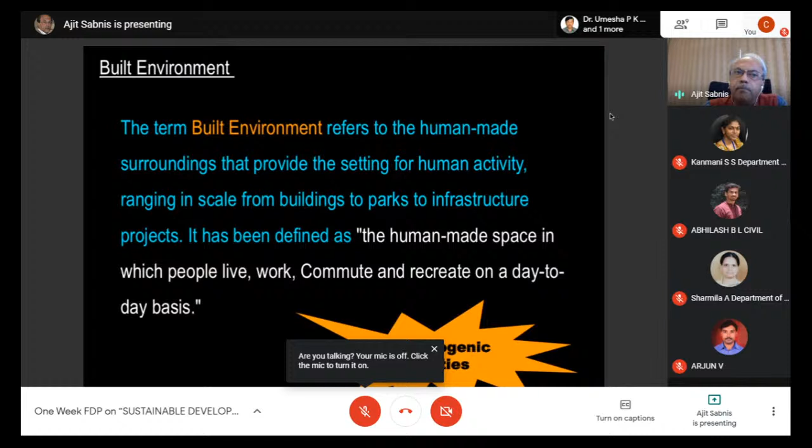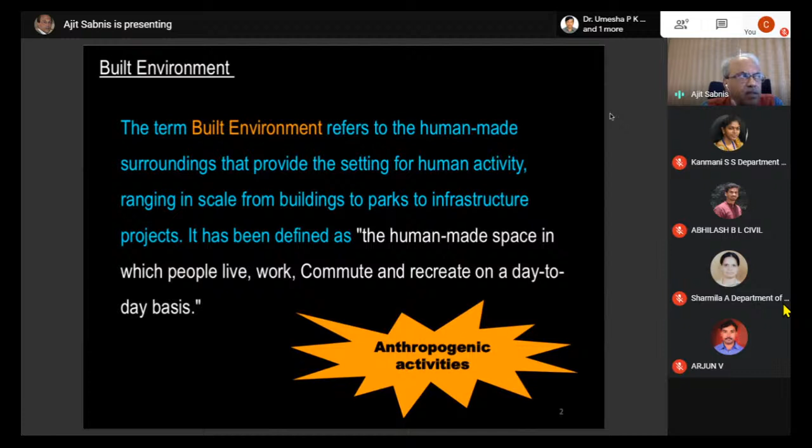It's basically half of the problem done once we understand the terminologies involved in it. The environment itself can be differentiated between natural environment and built environment. Now, we are more concerned with the built environment. Natural environment is all that we see, the rivers, the air around us, everything that is around us which is natural. That is natural environment.

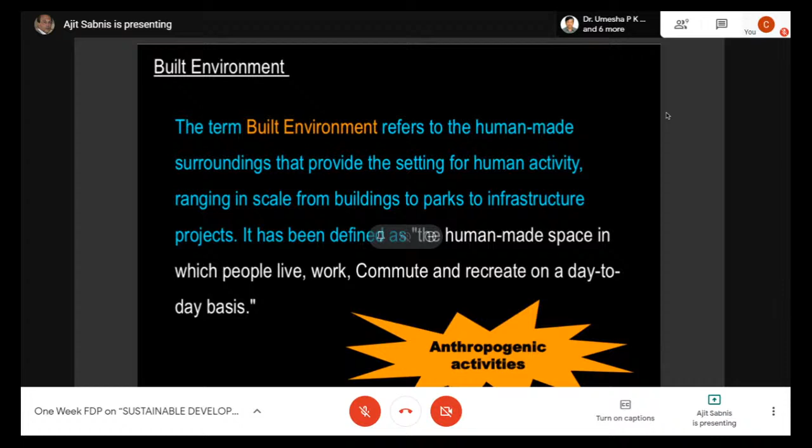Now, how do we define built environment? The term built environment refers to the human-made surroundings that provide the setting for human activity, ranging in scale from buildings to parks to infrastructure projects. It has been defined as the human-made space in which people live, work, commute, and recreate on a day-to-day basis. In a nutshell, all that we human beings build for our own comfort and living is called the built environment. It is the roads, the houses, the power stations, everything we build, whatever we demolish, everything we do for human comforts and human greed, that all comes under the built environment.

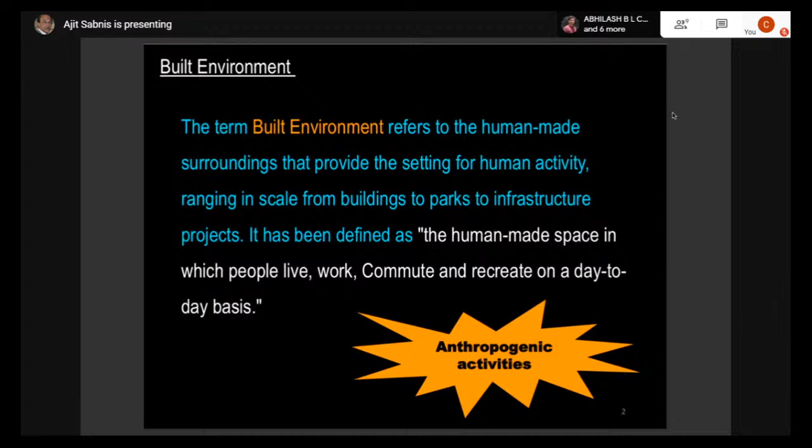Now, after built environment, what exactly is sustainability? How do we define sustainability? We have many definitions for sustainability. The National Building Code 2016 Part 11, Approach to Sustainability, a new introduction into the National Building Code, defines sustainability as the state in which components of the ecosystem and their functions are maintained for the present and future generations.

The present and future generations is to be underlined here. Sustainability never means that our present needs, present requirements, present growth, and present industrialization should be completely negated and everything should be reserved for future generations. That is not the definition of sustainability. As we go further, we will understand the true meaning of sustainability, but we have to look after the present generation's needs also, and the future generation's needs. So that is the definition of sustainability as per NBC.

Now, the World Commission defines sustainability in terms of sustainable development. Sustainable development is that which meets the needs of the current generations without compromising the ability of future generations to meet their own needs. Both definitions are the same in spirit and intent.

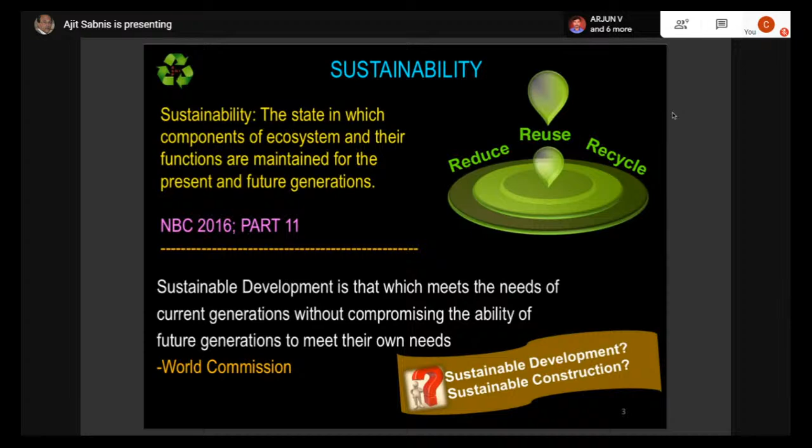Now buildings not only are constructed with inert materials, that is what the general opinion is, but no, buildings are, to me, actually living beings. Why are they living beings?

The buildings respond to the environment which is next to it. If the environment is adverse, if the environment is bad, then the buildings react accordingly. If there is a foul smell outside in the environment, in the building there becomes the foul smell. So whatever the environment is, the buildings reflect and then react to that and respond to that environment. For example, if we have a corrosive atmosphere outside, the buildings start responding to it in terms of corrosion. So these are the important things.

That is why buildings interact with the environment in various ways throughout its entire life cycle, from pre-construction to demolition stage. Now all four cycles are absolutely important. The life cycle of a building - the pre-construction phase, the construction phase, the operating and maintenance phase, and lastly the demolition phase.

So this is the life cycle of a building, and this also is the life cycle of a product. If you take a particular product, what is it in the initial stages and what is it in the present stage, and how during its maintenance and operation stage - the entire thing becomes a life cycle from its inception to the demolition part of it.

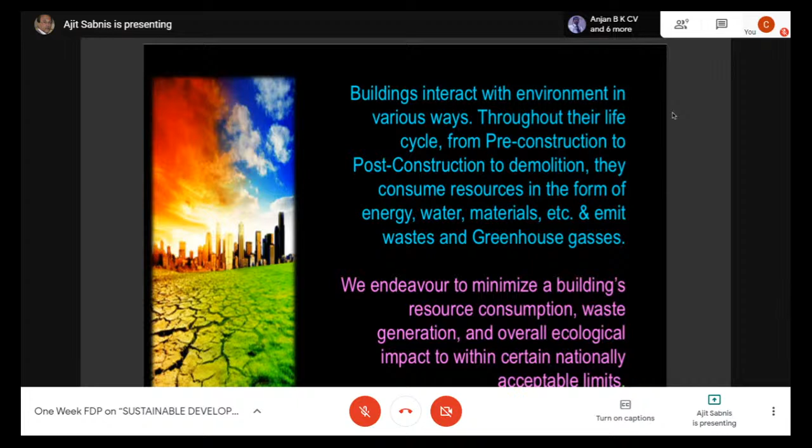Now we endeavor to minimize a building's resource consumption, waste generation, and overall ecological impact to within certain nationally acceptable limits. So this becomes extremely important. So in sustainability or sustainable development, we have to use - it is not that sustainability or advanced technologies or technological advancements should not be considered. This is a myth. Please understand that sustainable development is not going back to the olden days, etc. But in the present system, under the present circumstances, we need to evolve. We need to base our further development based on the wisdom what we have acquired from the past. So that is more important.

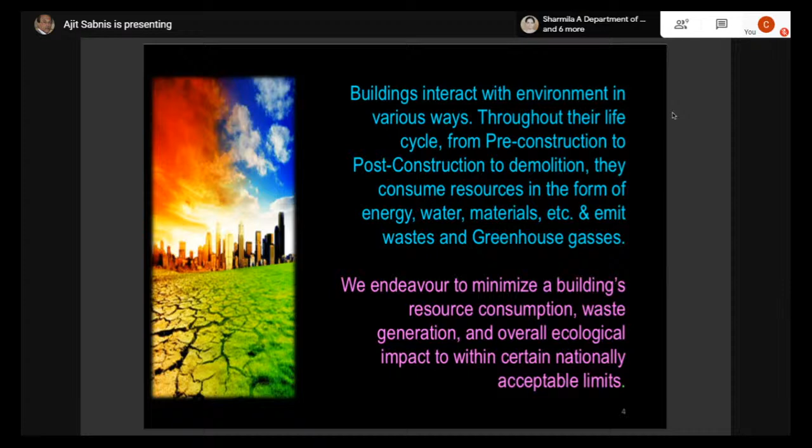So to be very frank, it is impossible for anyone to assess the sustainability to its maximum limit or in its entirety. We can only take the most impactful parameters and then look at them.

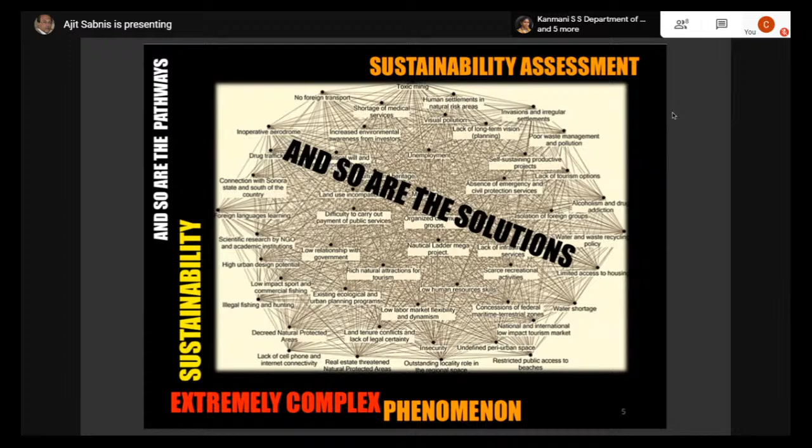Now the construction sector is absolutely important. The construction sector's contribution to the adverse environment is also very, very critical. Let us just see what exactly is that. Let us look at the contribution of the construction sector.

Globally, buildings are responsible for about 40% of the energy that is produced in the globe - the entire energy produced in the globe, construction sector consumes about 40% of it. An estimated 42% of the global water consumption and 50% of the global raw materials are consumed by the construction industry. And thirdly, an estimated 50% of the world's air pollution, 42% of its greenhouse gases, 50% of all water pollution.

48% of solid waste, and 50% of chlorofluorocarbons are all due to the built environment - directly or indirectly because of the construction industry. So dear friends, what this reflects is the construction industry, directly or indirectly, is responsible for approximately 40 to 50% of the impact that is happening in terms of sustainability or in terms of adverse effect on environment.

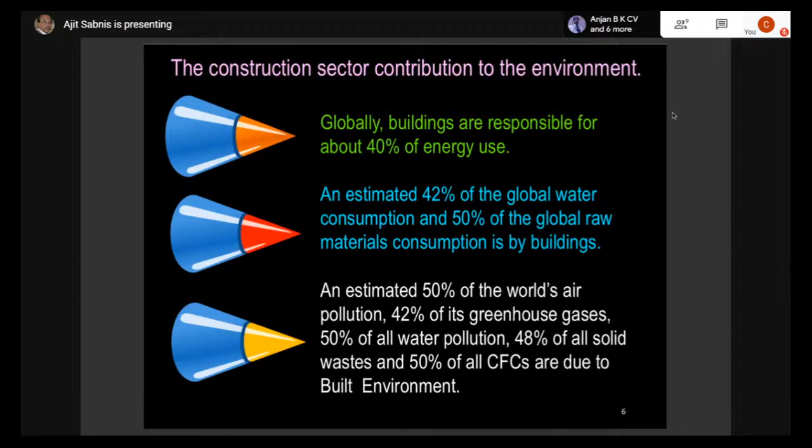Now let us look at the carbon footprint as far as India is concerned. India stands, sometimes third, sometimes fourth, but now it is almost in third position in terms of greenhouse gas emissions at the international level. First is USA, second is China, and third actually was all the European Union together, and together they emit about 55 to 60% of total greenhouse gases into the atmosphere. India, though in 4th position, emits about 6.5 to 7% of carbon dioxide into the atmosphere.

This emission of carbon dioxide or greenhouse gases is considerably reduced in the last 3 to 4 months because of the corona effect and the lack of activities happening. But please mind it, just because air pollution has reduced, the effect of global warming has not been reduced. It still continues to look into our eyes. I will tell you in future slides why that is so.

India emits about 6.5 to 7% of total greenhouse gas emissions, and in that, approximately 40 to 50% is contributed by the construction industry. This 40% of emission can be divided into energy produced and consumed, or greenhouse gases emitted, in a ratio of 75 to 80% to 20 to 25%.

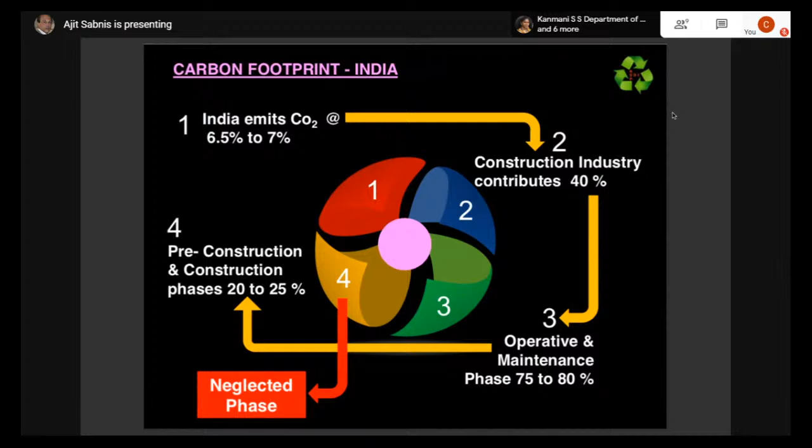Now we have seen a huge amount of unprecedented events in recent times. What are we seeing? Global warming, the warming of the earth, and consequent climate change is happening, whether we understand it or not. Increased carbon dioxide concentration in the atmosphere has been going on. The rapidity with which greenhouse gas emission is increasing, the rapidity with which ocean acidification is happening - the ocean acidification is happening at a rate which has never happened in the last 300 million years. The ocean waters are warming up even at 700 meters deep.

Rapidly changing rainfall patterns, accumulating waste, urbanization and rural migration - we were all hearing about these, but nowadays I think all of us have had an opportunity to understand what exactly is rural migration, what is reverse migration, what is urbanization. In the last 4 or 5 months, because of the corona and COVID effect, those people who came looking for jobs and a better lifestyle from rural areas came to urban areas - that is the migration, that is called urbanization.

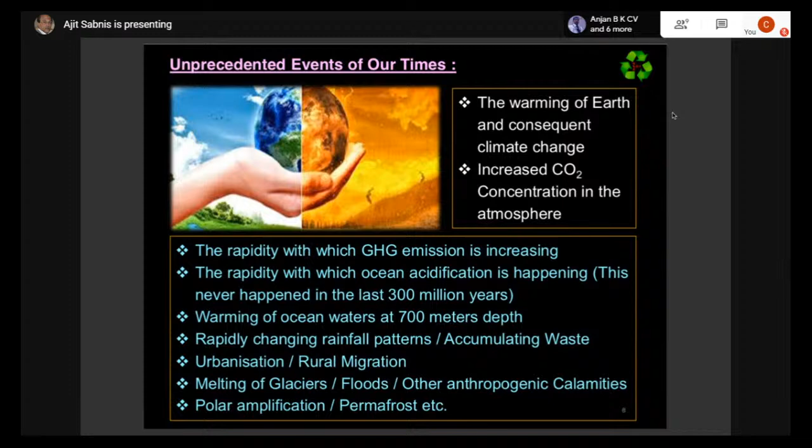Right? Now, let us look at what exactly is the urbanization cycle. We talked about urbanization. I gave you the example of how rural people come into the picture, causing urbanization. They come in search of good jobs, better living style, better education for their children, etc. Then because of this urbanization, industrialization starts taking place, because labor becomes available, so industries and startups start growing up. Government policies also play a major critical role in this.

Then, to address the existing increasing population, especially in the urban areas, infrastructure development takes place. That is roads, transportation, energy, power stations feeding power to the cities, and connectivity to the various surrounding areas. All these things come under infrastructure development.

The more urbanization, the higher will be the industrialization, and the higher the industrialization, the higher will be the environmental impact. Once there's environmental impact, higher will be the greenhouse gas emissions, and the higher the greenhouse gas emissions, the thicker will be the blanket. So there will be lesser heat that escapes into the atmosphere, causing global warming and causing man-made disasters. Once man-made disasters come into the picture, the migration that we saw from rural to urban areas, that reverses, and it's going to happen back to rural.

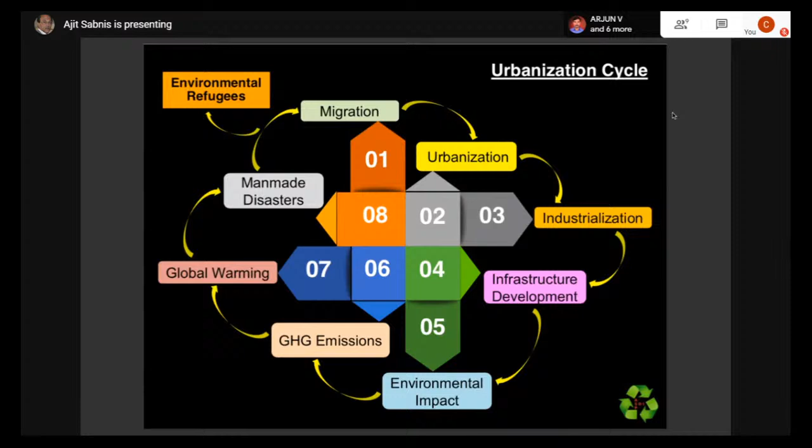Now, what is the next impact? What is the next terminology we try to understand? We understand what exactly greenhouse gases are. Greenhouse gases are compounds in the atmosphere capable of absorbing infrared radiation, thereby trapping and holding the heat in the atmosphere. That's what we explained and discussed just now.

Now, global warming is the increase of Earth's average surface temperature due to the effect of greenhouse gases. These greenhouse gases form a blanket that does not allow the heat to escape, so the heat gets accumulated, causing the warming up of the globe, the warming up of the Earth's surface, etc.

So the average Earth's surface temperature—where is it measured? It is not measured at every point, but at particular points on the surface, including the ocean. That's because 75% of the Earth is covered with water, so just 25% is land. We need to take the average of that, and the average Earth's temperature is increasing considerably.

Now, when we talk about the greenhouse gas effect, there are quite a few greenhouse gases. It's not only carbon—for example, carbon footprint is not the emission of carbon only, but majority of it is the emission of carbon dioxide, the gaseous materials or entities that come into the picture. Along with carbon dioxide, there is methane, oxides of nitrogen, fluorocarbons, and sulfur hexafluoride, etc.

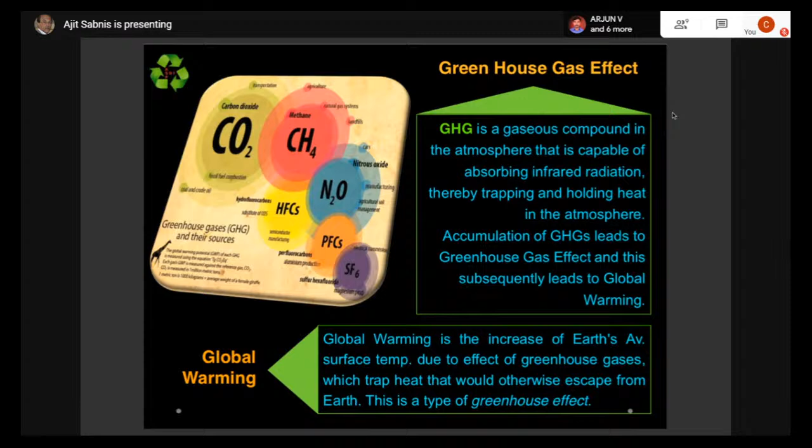This is measured using what is called the Keeling curve, using the Keeling instrument. This measurement was developed by a scientist called Charles Keeling, who mounted a set of monitors measuring carbon dioxide concentration in the atmosphere on a mountain top of Hawaii in 1958, and we are still using it.

In 1958, the carbon dioxide concentration was about 320 ppm, parts per million. Now, as of 2020, the carbon dioxide concentration in the atmosphere is 417.16 ppm. This is available every day from the carbon dioxide data, and I had taken this reading about 4 days back. If we reach about 450 ppm, it is extremely difficult for the human species to survive.

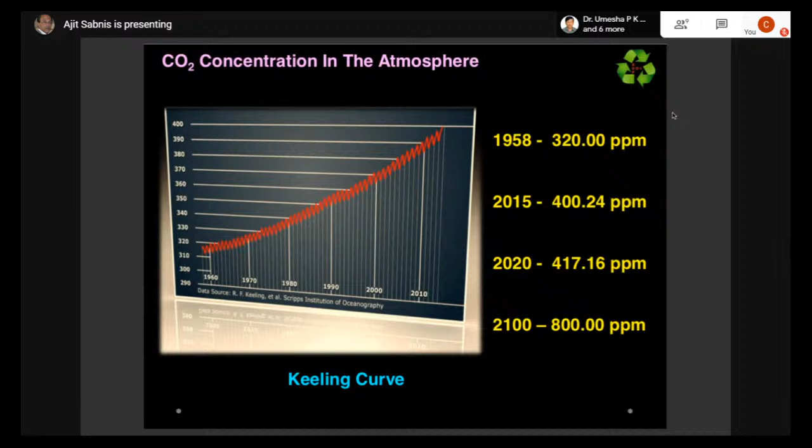Next, what is important is what is called global warming potential. As I said earlier, there are quite a few greenhouse gases other than carbon dioxide, such as methane, nitrogen protoxide, fluorocarbons, and sulfur, etc. All these things are converted equivalent to carbon dioxide. That's why when we say carbon dioxide or greenhouse gases expressed in terms of carbon dioxide, all other greenhouse gases are also involved, converted equivalent to carbon dioxide. This is called global warming potential.

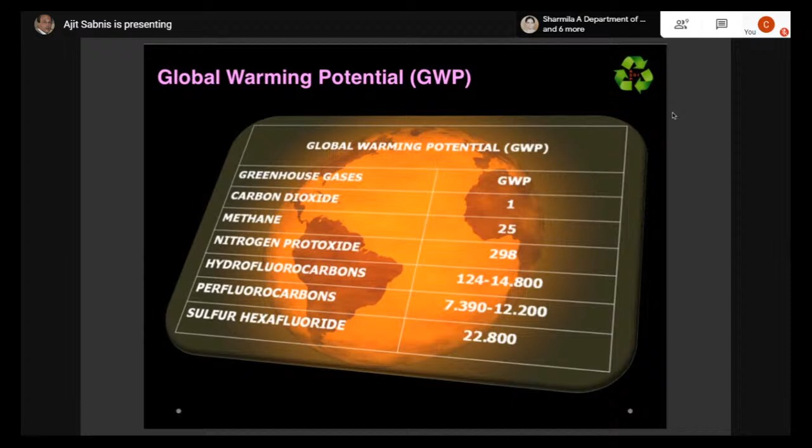Now the next important thing we need to know is global warming itself. What exactly is global warming? I would like to briefly recall your attention to 2015, when there was a summit called COP21 in Paris. COP21 is considered one of the very important summits from the sustainability and environmental point of view, wherein about 195 countries came together and signed an agreement.

By a 4 degree centigrade rise in average global temperature, a 50% decline in crop yield is projected. Melting of glaciers, loss of moisture from soil, changes in rain patterns, heat waves, floods, droughts, cyclones, etc. will continuously increase. There are quite a few coastal cities of the world, including New York, Tokyo, Shanghai, and Hong Kong, that all have a very real fear for their existence if temperatures rise by 4 degrees.

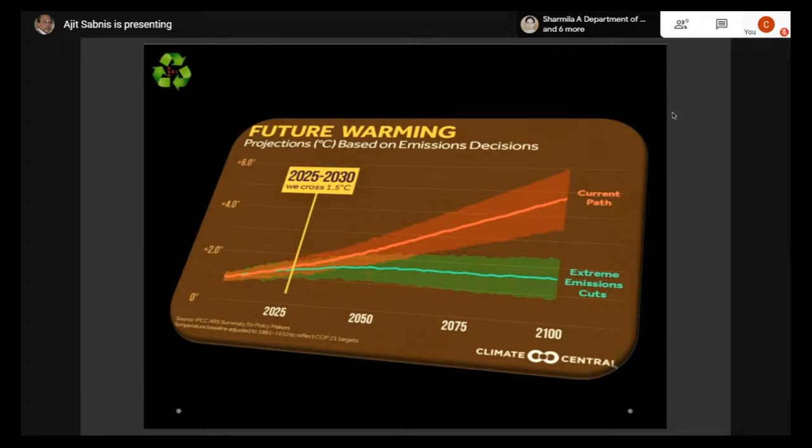Now what we are talking about is an increase of 5 degrees. That's why containing and controlling global warming becomes an absolutely important phenomenon. I also talked about polar amplification, which involves the melting of the ice and the exposing of what lies beneath, etc.

Now there is another important phenomenon. There is a lot of wood which gets hidden when ice formation takes place. When the ice melts, all this wood gets exposed to the heat, and it is all rotten wood. Because of the heat, it catches fire, which further increases the melting of glaciers. Not only that, it also enhances greenhouse gas emissions, particularly carbon dioxide emission in the atmosphere, which further adds to the problem. So this is actually a very complicated cycle, and this phenomenon is called polar amplification, which results in so many things.

So in a nutshell, what we can understand is the built environment, from an engineer's perspective, is responsible for greenhouse gas emissions, which is directly proportional to the warming of the earth. Then there's indiscriminate use of natural resource materials in construction, resulting in resource depletion, because we need more construction, more infrastructure development, and this will considerably reduce resources and cause depletion.

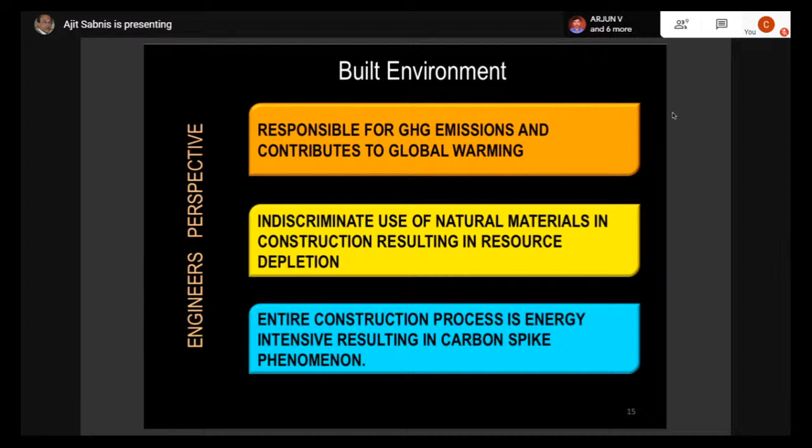And another important thing is, it is not the human species alone that lives on planet Earth. The entire ecosystem, the entire biosphere, comprises several species. They say it is around 84 lakh species, including the human species, that exist on the earth.

By development of infrastructure, by building roads, etc., we cause what is called habitat fragmentation, which you would have seen considerably - elephants crossing roads, cheetahs on the road, etc. When we start occupying their space, where roads pass through forest areas, the animal species get confused. They suddenly find something new in their regular pathway, and they get confused.

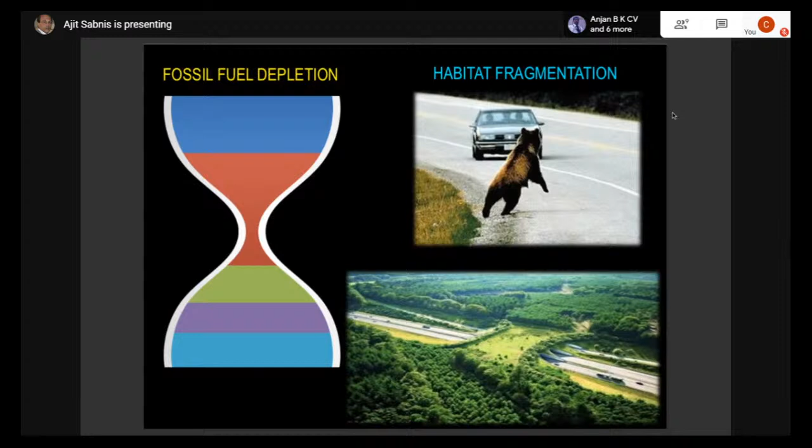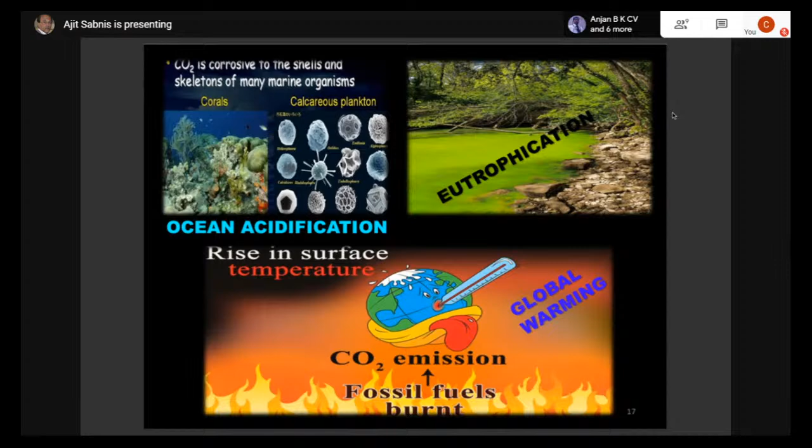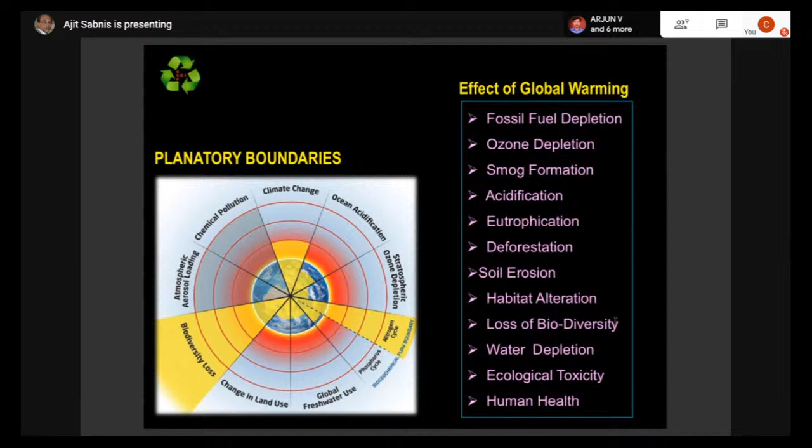But dear friends, we have no other option, isn't it? So that is why the first term in the title of the seminar is 'adopt' - we have no other option, we need to adopt these changes, but simultaneously we can't remain complacent about what is exactly happening. On the right side, you see various effects of global warming, which we already discussed.

Now we come to the next important terminology, called embodied energy. Embodied energy is the total non-renewable energy that goes into the manufacture of a material, and it plays a large role in the choice of building materials. For example, let's take the ceramic tile - if you want to calculate the embodied energy of a ceramic tile, what do you need? You need to take into account the entire life cycle of the ceramic tile.

Now, what is the starting point of the entire life cycle of a ceramic tile? The starting point is the extraction of the raw materials required for making the tile. For extracting the material, you need equipment at the site, so the energy or fuel consumed by the equipment is counted.

The second stage is transporting the raw materials from the source to the factory, which consumes energy. At the factory, there is a huge process of converting and heating the ceramic, adding admixtures and other compounds, then burning it to about 1400 degrees centigrade.

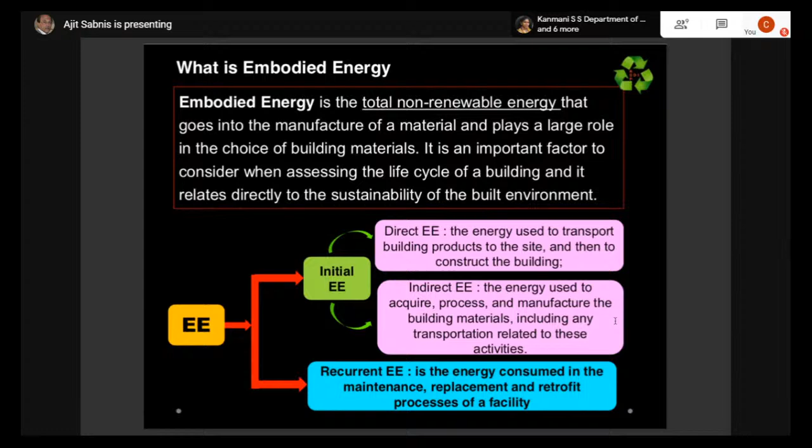Next, let us look at what is important: the embodied carbon. Similar to embodied energy, embodied carbon also exists. What exactly is embodied carbon? During the entire process of manufacturing a product, taking the ceramic tile as an example, all that which is embedded in the manufacturing of the tile is the embodied carbon.

Embodied carbon is the carbon footprint of a material. When I say carbon footprint, remember it is the emission of all carbon greenhouse gases, including 5 or 6 other primary gases, which are converted equivalent to carbon dioxide, and that is called the carbon footprint of the material.

It considers how many greenhouse gases are released, and embodied energy is expressed in terms of joules per square meter, or per unit, or per kg, or per volume, etc. Embodied carbon is expressed in terms of kg carbon dioxide equivalent.

This is very important, the small 'e' which means equivalent. When we write equivalent, all other 5 or 6 greenhouse gases are converted equivalent to carbon dioxide per kg. Embodied carbon can be measured from cradle to gate.

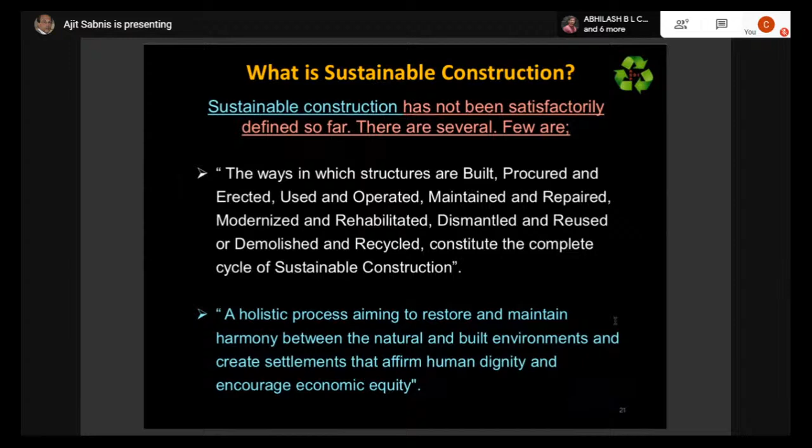There are several definitions which I would not like to go through, but are available to you on your screen; you can refer to them later. What is important is the one which I have underlined, the most apt definition I felt: sustainable construction is the creation and responsible management of a healthy built environment

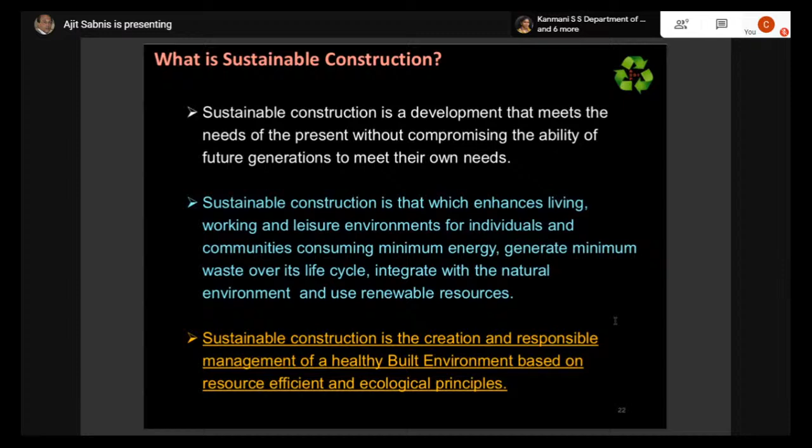based on resource efficient and ecological principles. All these principles we talked about—reduce, reuse, recycle—and understanding the various terminologies which help in reducing the consumption of natural resources, should be involved in the sustainable construction process, so that we do not cause much deterioration to the ecological surroundings and the environment continuously.

Now let us look at what exactly sustainable construction involves.

Sustainable construction involves a very wide scope of activities, and primarily it starts with the designing part of it. How do we use the space? How do we optimize the space? Let's say we have an extension area, Jayanagar, and in Jayanagar I have a 60 by 40 site. How do I optimize all my requirements? That is the space, the planning stage where it comes into it.

Once the planning stage is completely done, then the structural design part of it. These are actually the pre-construction phase of the material, we can say: the space and structural design, and then the conventional and alternative materials.

We also should list what exactly are the materials which we are going to use. Are they going to be local materials? Should we get it from outside because of their non-availability? What is my requirement? And now we need to assess the sustainability part of it, how sustainable the building I'm going to build is going to be.

Then the construction technology - what kind of technology am I going to use? Am I going to construct using the conventional method? Am I going to use a precast method? Am I going to use a monolithic method? What type of technology do I use? So that comes into the big picture.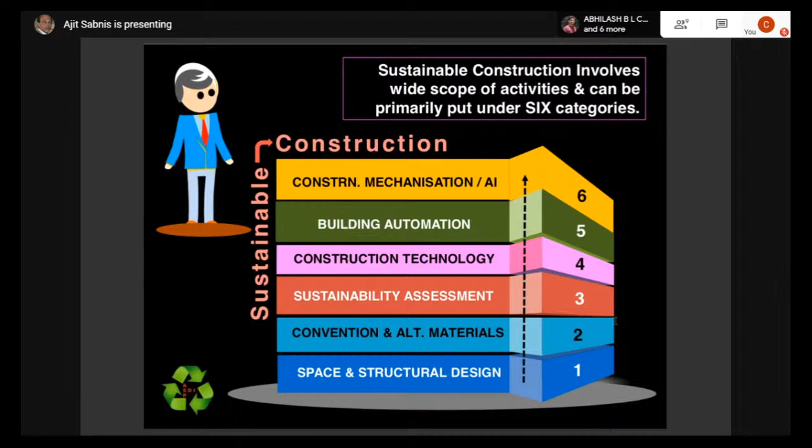The majority of environmental impact happens in the construction phase. Why? You can imagine which is the most important point during construction - what is that one particular product, or few products, which cause very high impact on the environment? It is actually the cement content in the concrete, and the reinforcement made out of virgin ore. That is virgin steel, what we call it - when steel is neither recycled nor reused, it is called the virgin cycle. These are the 2-3 main items, and there are a lot of other parameters which contribute less, but all these things get used mainly in the construction phase itself.

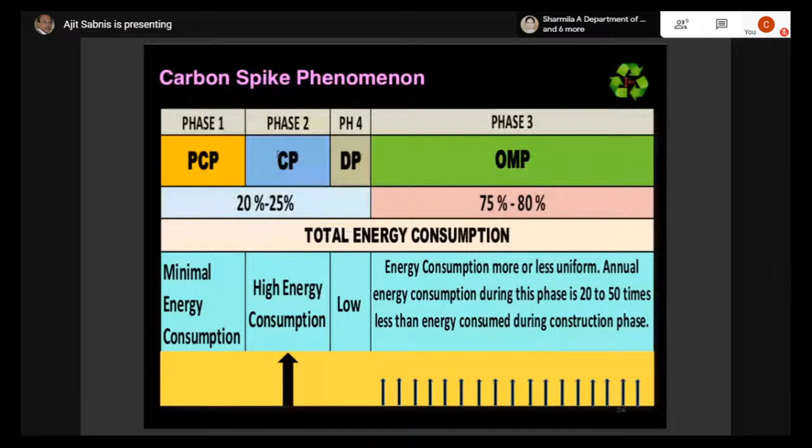Now there is another important concept - the urban heat island, which I already talked about. When the infrastructure improves and grows, we cover the surfaces with concrete, and more heat gets reflected back; the more construction, the more heat. That is the urban heat island effect, and it affects the microclimate, etc.

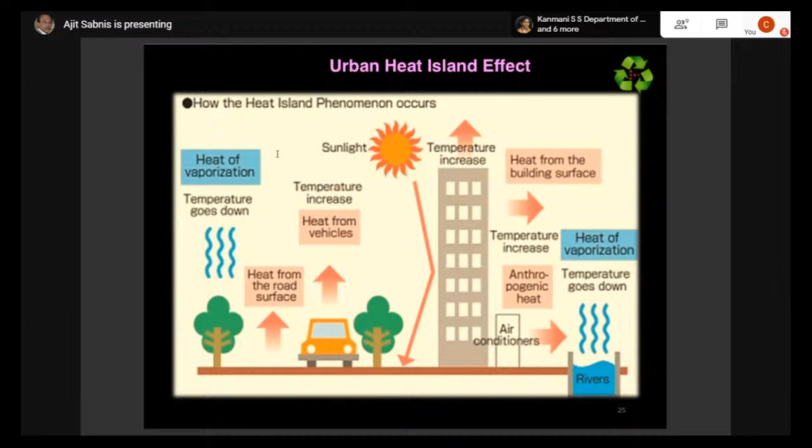Now these are the 17 goals - let us come to the sustainability goals. I talked to you about COP21 in 2015, where about 195 nations came together, and irrespective of developing or underdeveloped country, all the countries divided the entire global challenges into 17 challenges, and those 17 challenges are called the 17 Sustainable Development Goals.

The idea of doing this is, by 2030, is considered extremely important from the global agenda point of view. All the countries on planet Earth have committed themselves to see that by 2030, carbon emission becomes zero. So that is only 10 years ahead, and we actually have a long way to go.

Our efforts are not at all sufficient. It is not only Indians - India, in fact, is much far better, but the other countries, etc. So this is where the confusion comes. Should we not look at the sustainability only?

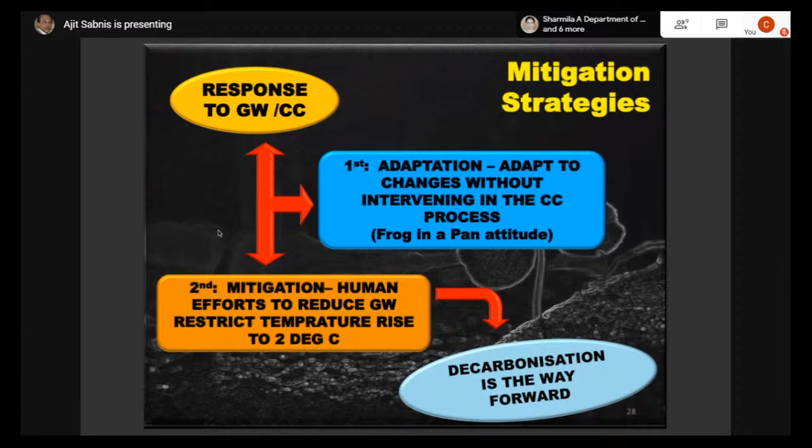And then the third step in mitigation is decarbonization, going forward. Now, what exactly are these things? We will move quickly and look at it in the next 2-3 slides. Now, adaptation to climate is already changing. Now, this phenomenon is extremely important.

If the design life of a building is about 60 years, 70 years, there is already what is called a lock-in period. That is what I said about carbon dioxide, which was already emitted about 75 to 100 years back, and is still in the atmosphere - it is not yet dissolved. So even the slightest accumulation or addition to that atmosphere, that greenhouse gas locked in, forms a blanket, and it further increases. So there is what is called a lock-in period.

Now, if as a designer, for a building design today, and if my building's design life is about 60 or 70 years, if I don't consider the environmental impact for this building, we are not truly doing any justice at all. And this is where we have miserably failed. So we need to look at a paradigm shift that has to be brought into the designing aspect itself.

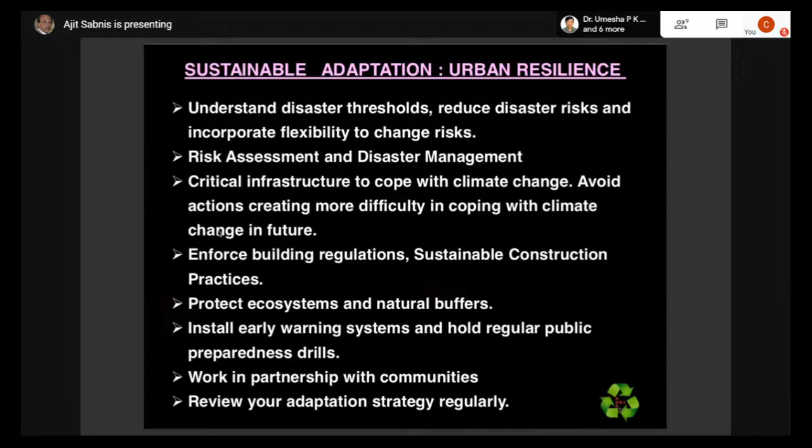So now climate change is a global agenda. As I said, 2030 is very important, and that is the adaptation part of it. Now, what is sustainable adaptation, urban resilience, etc., which we have already discussed about these things. So I would like to quickly skip this slide and come to decarbonization as engineers.

Now, how do we decarbonize? What exactly is decarbonization during the construction methodology? How do we reduce the emission of carbon dioxide? We need to adopt measures to reduce fossil fuel burning. That means clean energy options have to be adopted.

Increase the carbon sinks - what exactly is the carbon sink? That is, afforestation has to be done. That means carbon absorption has to be done. At the same time, conversion of carbon absorbed into oxygen has to be done, which means we need more forests, we need more greenery.

So that is actually a forest area, a green cover is actually called the carbon sink, in general way we can take it. Exploding population has to be completely controlled. We need energy efficient systems, adopt clean energy, shift from fossil fuel to renewable energy, which we talked about - solar, wind energy, tidal energy, anything other than fossil fuel energy.

Then re-engineer high energy materials. That means you start using materials which have got lesser embodied energy, lesser embodied carbon. All this energy economy has to be brought in, introducing smart grids, etc.

Increase the recyclability, reuse, and reduce the waste generation. In a nutshell, decarbonization comprises of 3 major steps: energy efficiency, low carbon power, and fuel switching. These are the most important things that come in our way when we talk about decarbonization methods.

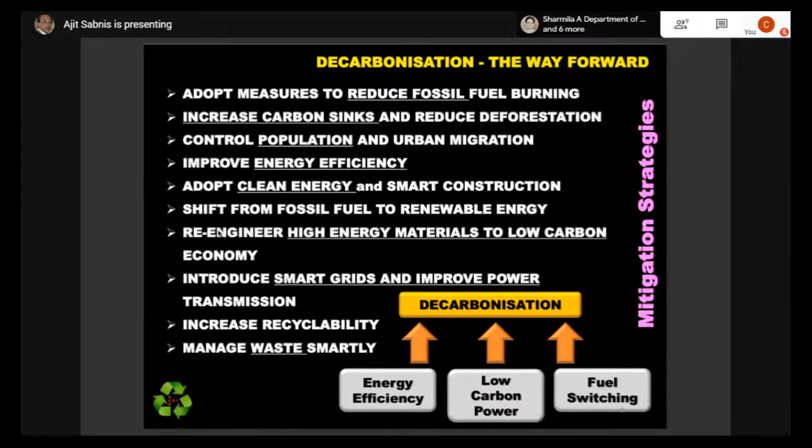Now let us look at the emerging trends in construction technology. It's projected that urbanization - this pandemic, the 3-4 or 5-6 months we are facing - is a very temporary phenomenon. People are going to come back to the cities. Urbanization is going to be there, it is inevitable. Now when urbanization continues, there will be pressure on the land mass.

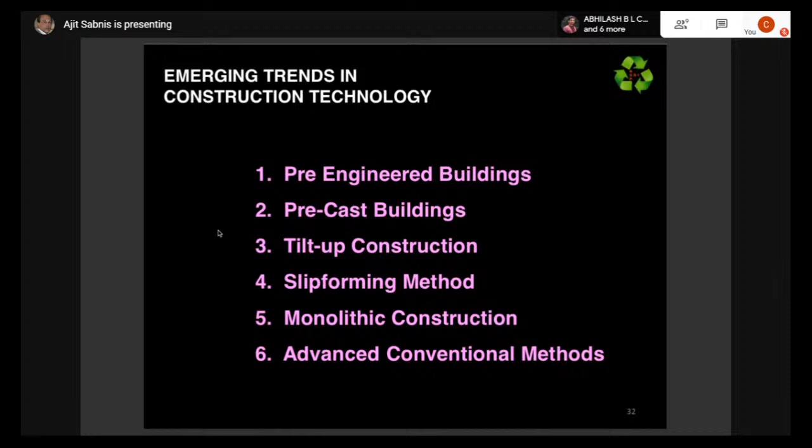Sites will not be available. Land for people who come into urban areas is not available. So we start building with different construction technologies. These are a few very popular technologies which are going to be very effective.

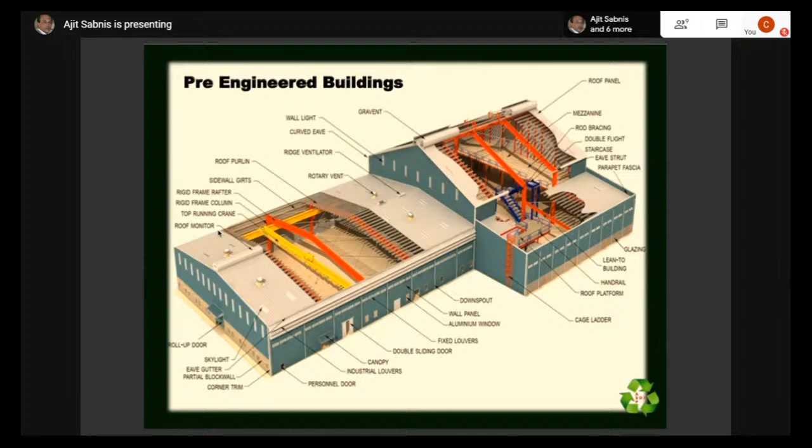One is the pre-engineered buildings, which will be very popular. Then precast construction, which will come into play. Precast construction reduces and improves a lot of quality, reduces waste generation because it is done at ground level. Quality is maintained, material wastage is minimized, and construction mechanization takes place. So it harms the environment less.

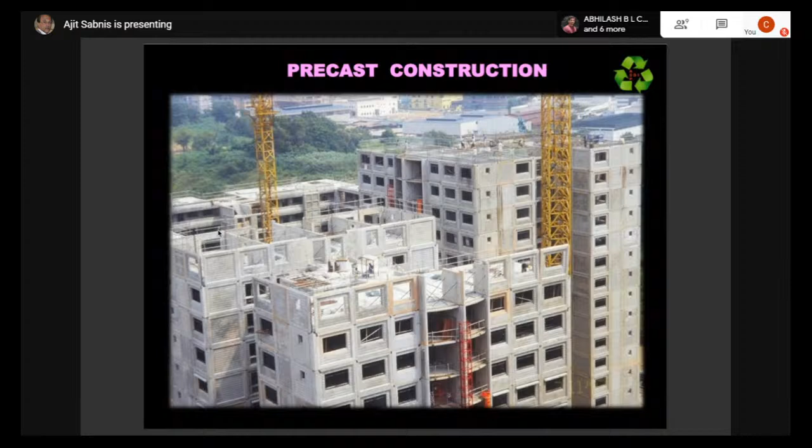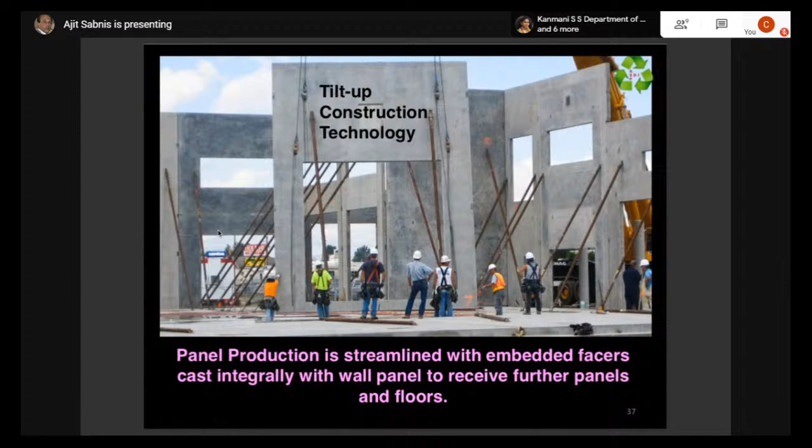Next we have the precast honeycomb construction, which is also a composite kind of construction. Next we have what is called biomimicry - that is, you mimic nature and reduce your environmental effect. The tilt-up construction technology, where construction is done in panels just next to the site, cast like a precast unit, and then tilted up as you see at the site.

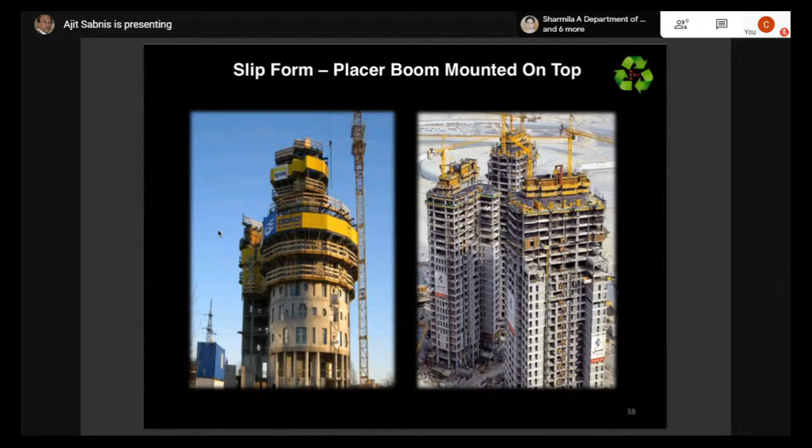For high-rise buildings, we have slip form technologies and jump form technologies. The formwork and advancement in formwork technology is altogether a different subject which we never get exposed to during our engineering course. This is extremely important for us to understand. That itself is a course by itself, requiring at least 4 to 5 hours to cover the different formwork. But this is what slip forming is - tall structures need these kinds of different technologies.

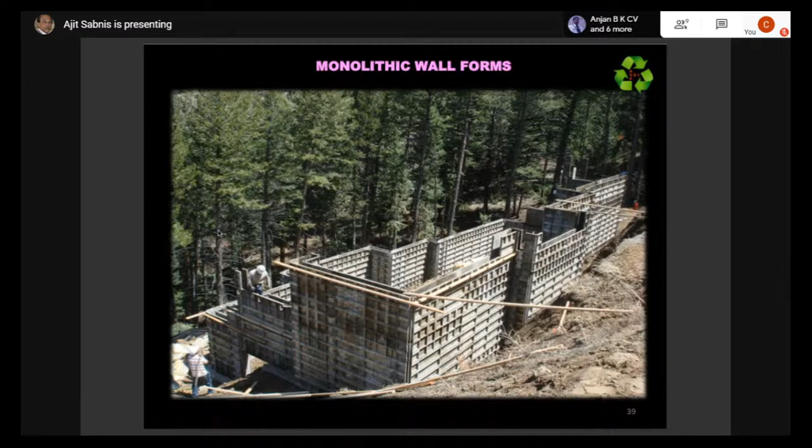From these things, we have what is called construction mechanization. Because of labor non-availability, non-availability of skilled labor, a lot of equipment from small to big are coming into construction. This is called construction mechanization. We need to use this to increase productivity, improve quality, and minimize the use of natural resources.

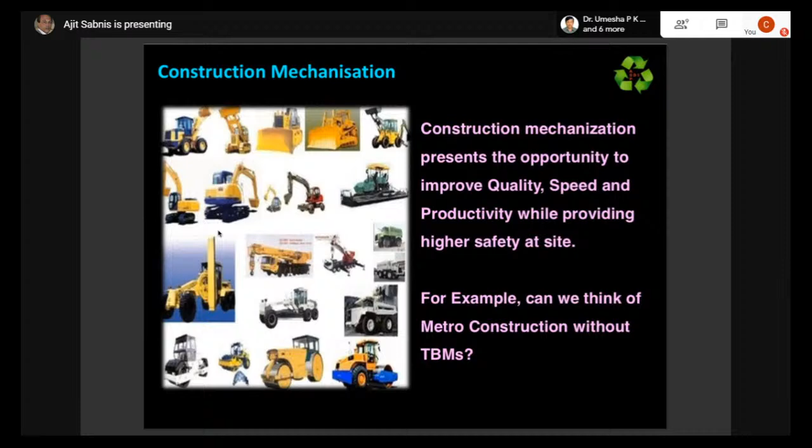For example, the reinforcement which is factory fabricated - the AutoCAD drawing gets integrated with the bar bending schedule software, and the fabrication, bending, cutting, everything is done. The particular reinforcement is designated in bundles, for example beam number so-and-so has got a designation. Once this is done in the factory, it becomes part of construction mechanization - it is only installation. So there are a lot of advantages we see in the construction industry.

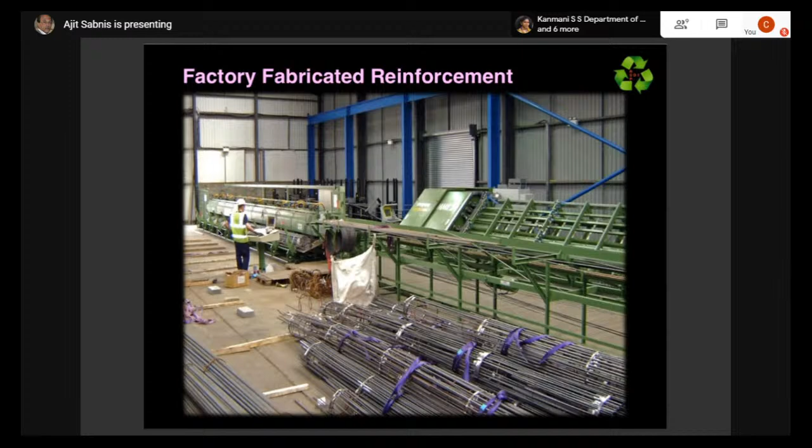Now coming back to new generation materials - we cannot completely retain only old generation materials, but new generation materials. For example, we have bendable concrete, self-healing concrete, translucent concrete, electrified wood. We have bioengineered bricks, sensitiles, and several others. Then we have 3D graphene. All these things which are coming, which you see on the boards, a huge number of new generation materials are coming.

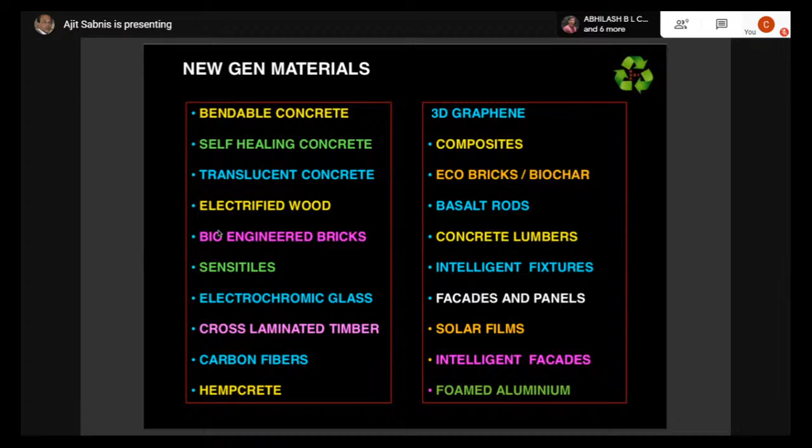They impart more efficient, highly advanced technology, and then optimize the energy, helping us improve a lot of parameters in the development part. So this happens to the construction material.

There is also rammed earth technology, which is not very popular in India, but earlier every building used to follow this. I am also involved right now in about 3 to 4 projects near Pondicherry using rammed earth construction. This is one of the very popular techniques, and quite a few architects should be appreciated for using these technologies. Now they are trying to bring back these eco-friendly structures.

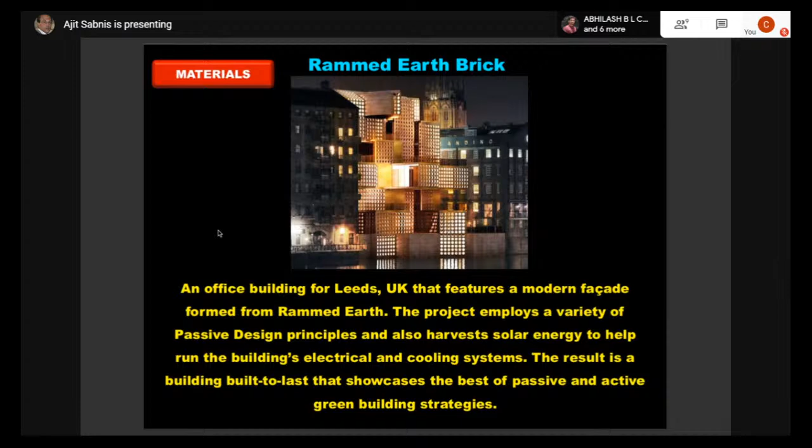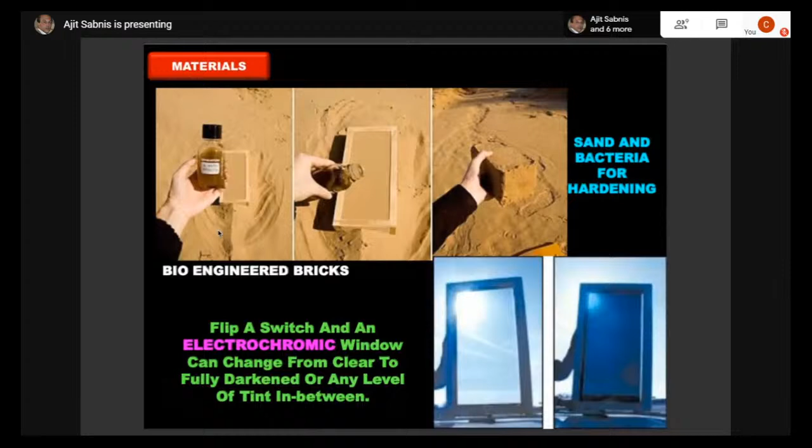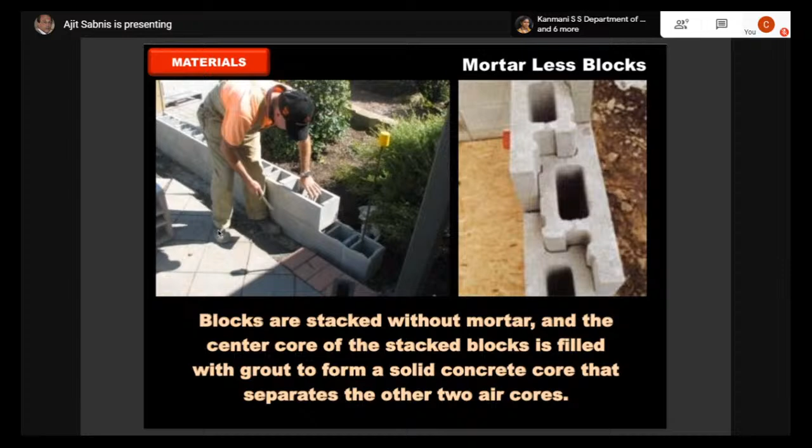These are the materials we talked about. You can get these things from Google, the materials and even the technologies, which are actually the mortarless technologies that have come into the picture. There is no cement, there is no mortar, the self-interlocking materials come into the picture. Now, these are the autoclaved bricks.

Now we come to the last few slides, and we get a little more technical into this. How do we analyze this, and how do we actually understand the sustainability part of it?

As we know, construction materials are already available to us, and there is already embedded energy, that is embodied carbon, and greenhouse gases or the embodied carbon in the materials which is already embedded. We also have the outside phenomena, where there are greenhouse gases which get locked in. So essentially, sustainable construction, or sustainable development, is about understanding the interaction of construction materials, embodied energy, embedded energies, greenhouse gases, and the outside. It is all the synchronized or synergy effect of these materials.

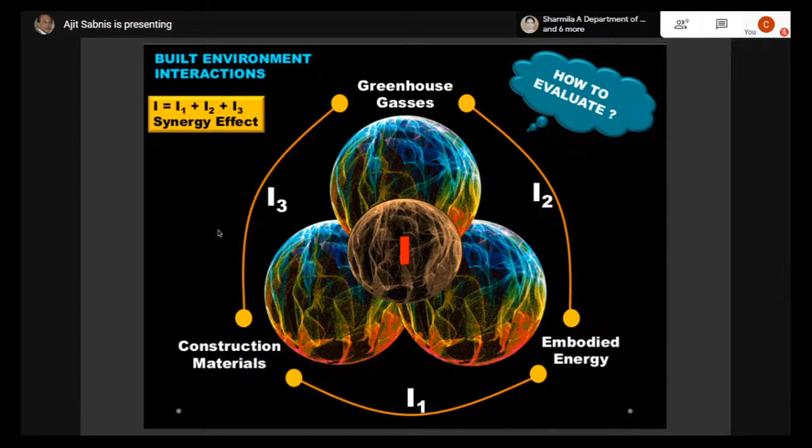All these parameters have to be understood to measure and quantify, to assess the sustainability of a particular building.

We all know the activity percentage generally works like this. For example, superstructure costs about 20-25% of the total cost of the building. These are the economic percentages taken. Joinery and all other things take about 15%, etc. This is for the conventional building.

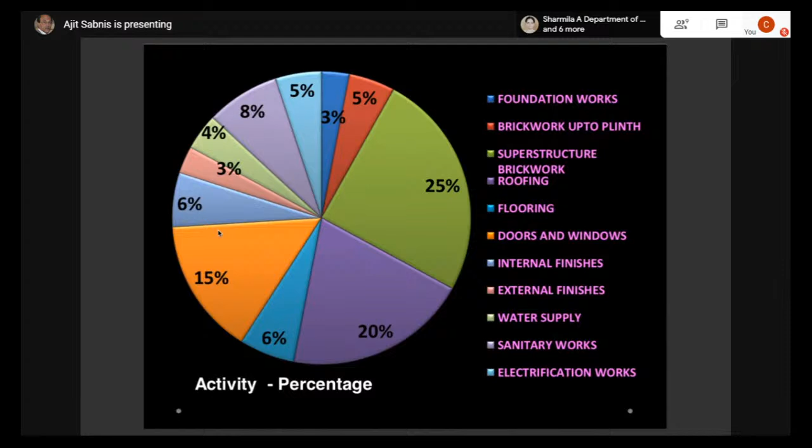Now, when we start assessing from the sustainability point of view, let us quickly go through these slides. I have taken an 18-floor building, which is an RCC framed structure, because it is in urban areas which you get more and more impactful. The total area is about 2.5 lakh square feet, or 25,000 square meters. We use solid concrete blocks, etc. Now let us look at the sustainability assessment.

Kanmani, can I take another 5-10 minutes? Yeah, sure sir, sure sir.

Continue, yeah thanks. So let us understand this sustainability assessment using three approaches, keeping the life cycle analysis in the backdrop. We will try to assess the building from the embodied energy perspective, from the embodied carbon perspective, and then this SDI perspective. What is SDI? SDI is Sustainability Development Index.

The United Nations Environmental Program and the UNDP both ask for developing locally applicable sustainability development indices, because the climatic conditions of Bangalore are not the same as the climatic conditions of Jaipur. The climatic conditions of USA are not the same as the climatic conditions of India. So there is no point in using those materials. We have a fancy idea that glazing does not actually suit the subcontinent Indian climatic conditions, except in cold climatic conditions it may be suitable, but not in other areas. So this is where the UNEP and United Nations Development Program ask for evolving locally applicable sustainability development indices. What are sustainability development indices? We will see later.

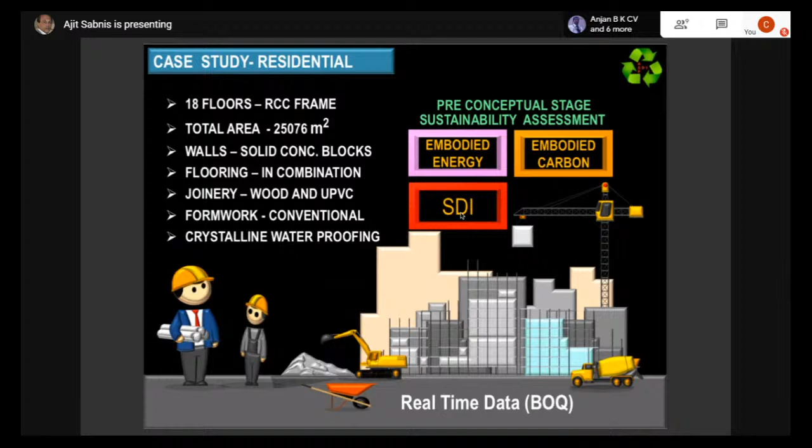Now, from the embodied energy perspective, when we talk about it, we only talk about the assessment, and embodied energy is the life cycle analysis through the life cycle. The assessment is based on the energy consumption through the building's entire life cycle, that is cradle to grave. This is based on real-time data or the bill of quantities, and depends on various inventories. So essentially, embodied energy bases its assessment on energy consumption.

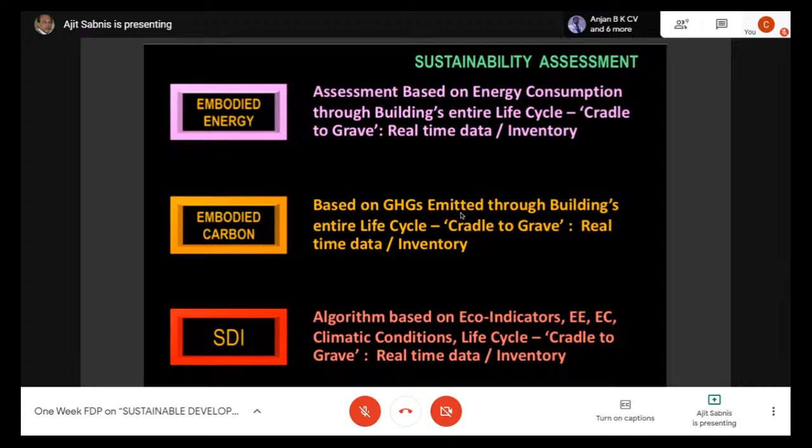Similarly, embodied carbon assessment is based on the greenhouse gases emitted through the building's entire life cycle, that is cradle to grave. Now the SDI, that is the Sustainability Development Indices, is actually an algorithm based on several eco indicators, including embodied energy, embodied carbon, climatic conditions, and a transportation coefficient. All these things, several eco indicators, are included. Now let us look at it in slightly more detail.

What you see is the sustainability engineers, material properties become extremely important. For me, as a structural engineer, as a civil engineer, for a high-rise building, the strength of the material is absolutely important. Modulus of elasticity of the material is important. Its density is important. Several other material properties are very essential for me to consider in my design aspect.

Now, we have already seen what are the embodied and embedded energies, embodied energy, embodied carbon, etc., which is in the materials. Then water is another important parameter, and the coefficients of embodied energy and embodied carbon, transportation energy, design period, operational energy, cost of construction, cost of labor, cost of all these parameters actually vary from place to place, and that is why all these parameters have to be integrated, and then a mathematical formula or assessment has to be done, and that is called Sustainability Development Index.

I had an opportunity to submit to the nation this ASP SDI, which is called Assessing Sustainability Parameters through Sustainability Development Index. This Sustainability Development Index is applicable to all climatic conditions at the conceptual stage, meaning before the construction of the building takes place, everything can happen. This Index is based on about 28 ecological and engineering parameters expressed in terms of percentage as compared to a benchmark project.

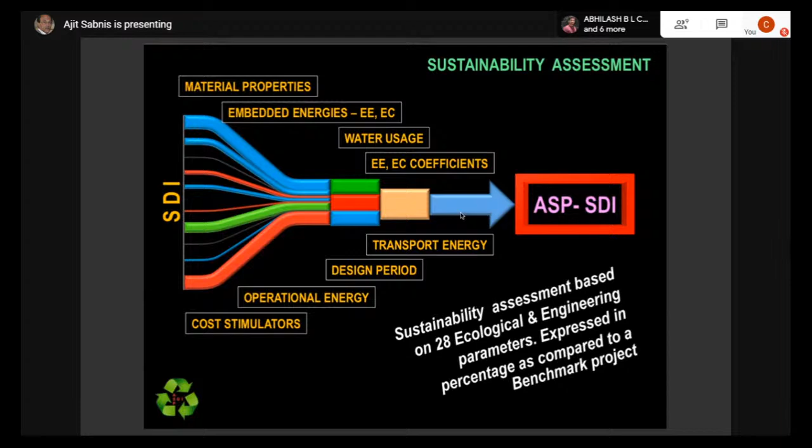So these are the three important assessments: one is through embodied energy, the other one is embodied carbon, the other one is through Sustainability Development Index.

Now, we can calculate for the case study we have taken. We can put all the activities into these 10 to 11 parameters from the bill of quantities, from the planning stage itself, and then the total embodied energy per square meter can be calculated. That embodied energy comes to, let us say, 5,185.73 megajoules per square meter. Now this is the embodied energy.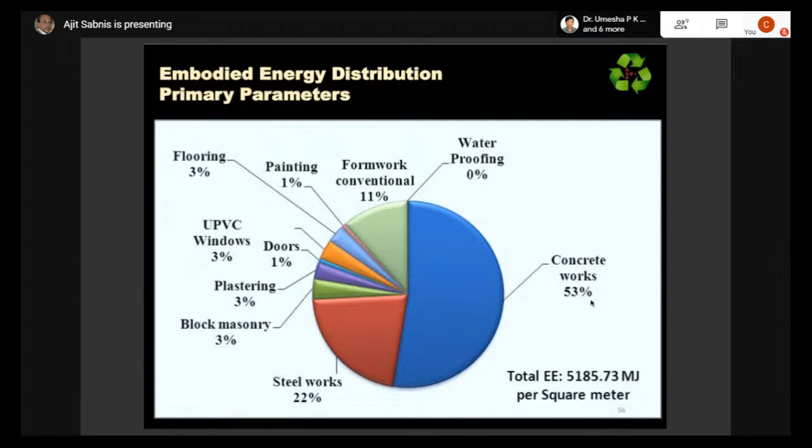Now, in terms of quantification, embodied energy per square meter comes to about 5.18 gigajoules per square meter, and total embodied energy for the entire building comes to about 13 crore megajoules. If you convert those megajoules into units of electricity, it comes to about 3.64 crore units. At the rate of 8 rupees per unit, taking it as a commercial rate, it comes to about 29 crores. Do you understand that 29 crores is the embodied energy component in this particular building?

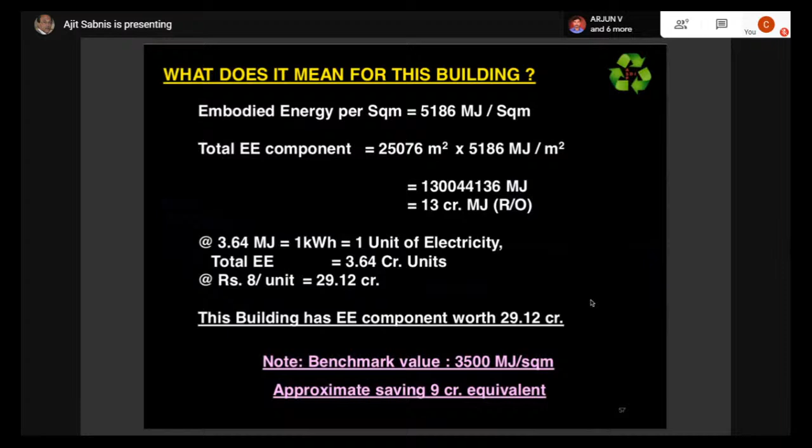Now, similarly, if you start applying sustainability measures, the benchmark value is 3,500 as against 5,186. So if you start reducing and applying various mitigation strategies that we discussed, and start going towards this 3,500 — let us assume that 5,186 I bring it down to 3,500 megajoules per square meter — then my saving would be about 9 crores in a project of that size. This is just to give you an idea from the finance perspective.

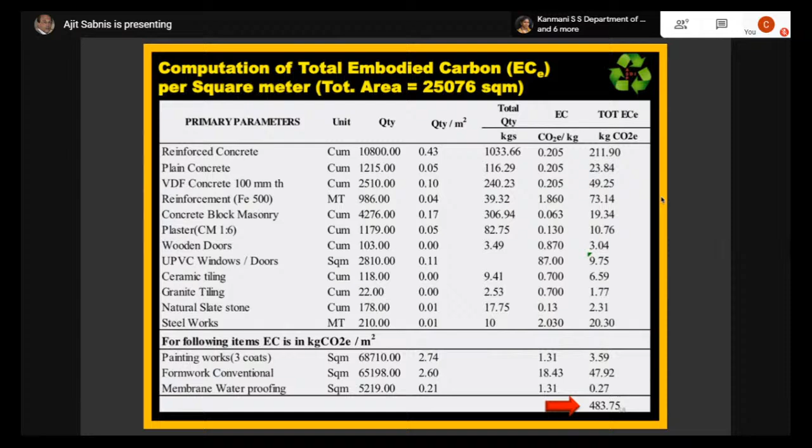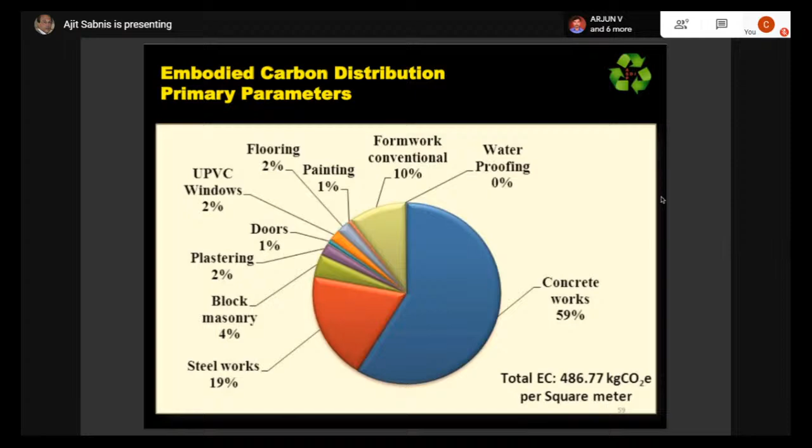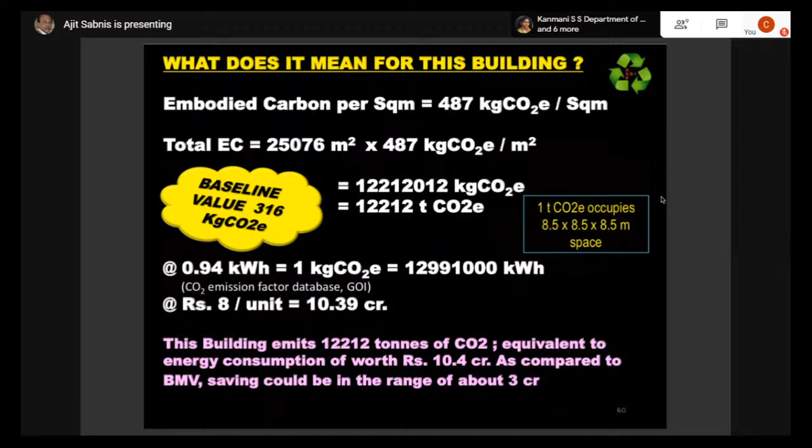Similarly, embodied carbon can be calculated for the entire project per square meter. Here it comes to about 483.75 kg CO2e, the total embodied carbon component for that building per square meter. Similarly, when we express it from the embodied carbon perspective, the same parameters — concrete, steel, formwork — give an indication. When we convert that into the finance equivalent, the total component comes to about 10 crores. This is just to give an indication of how important reducing embodied energy and embodied carbon is, by saving materials, using recycled materials, etc.

Now, similarly, from the sustainability development indices, it involves a lot of calculations, lot of tables, and intricate work. But ultimately, let me come back to you — for this particular building, as I said, it is the synergy interaction, and the total energy interaction comes to about 30,291. So this is just a number.

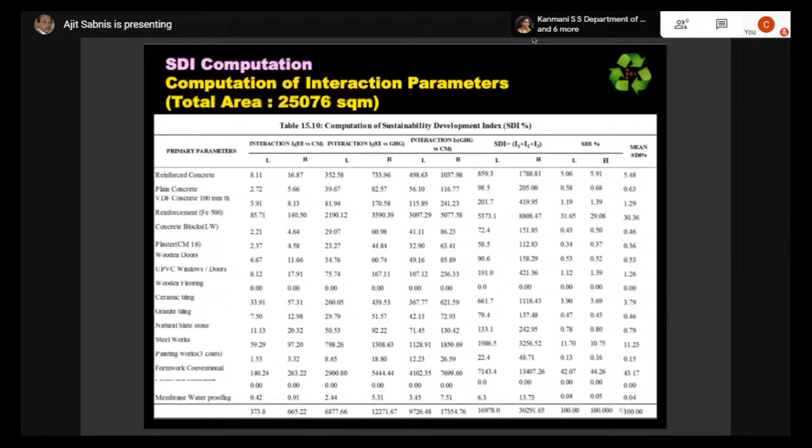It is a unitless number, ultimately expressed as a percentage. Through the same approach as the pie chart expression, we can identify the steel component, the formwork component, and the concrete component. Interestingly, the concrete component

forms much less impact, for the simple reason that we have contained a lot of other parameters. Concrete is the only material which survives, which is durable for a very long time, which will be there for a long time. After it is cast, it requires very little maintenance. All those things come into the picture, and that is why the component becomes extremely less.

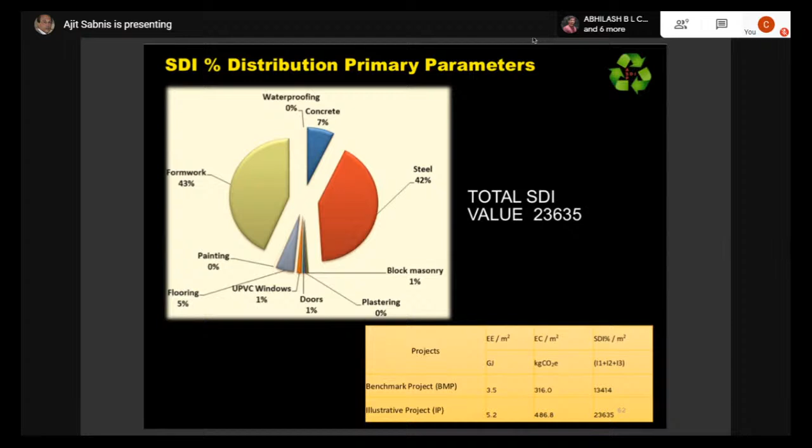Similarly, since most of you are students, we can apply this to every system. There is no individual item which can be used alone. Cement cannot be used as an individual item in construction. It always has to be used as part of a matrix.

is no repetition or reuse. Maximum usage is about 4 to 5 times. Then it becomes waste.

But with plywood, there is a moderate impact because the number of repetitions is more, and the supporting system is much different from the conventional system.

When you use aluminium formwork, from the embodied energy and embodied carbon point of view, it has high embodied energy. But when you use it as a system, it gives the least impact, because 85 to 95% of the aluminium can be recycled. So recyclability comes into the picture. The number of repetitions is about 200 to 250, so reuse comes into the picture.

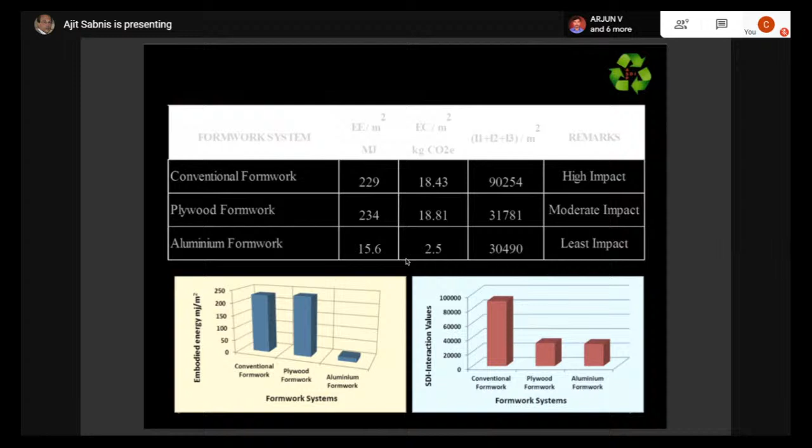And because of using this, we get an extremely good finish, and the plastering activity is completely reduced, so reduce comes in too. So all three principles, recyclability, reduce, and reuse, come into the picture and contribute to aluminium formwork.

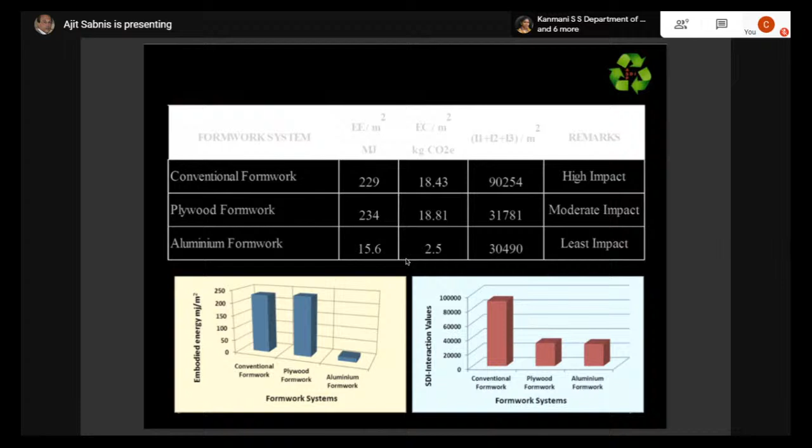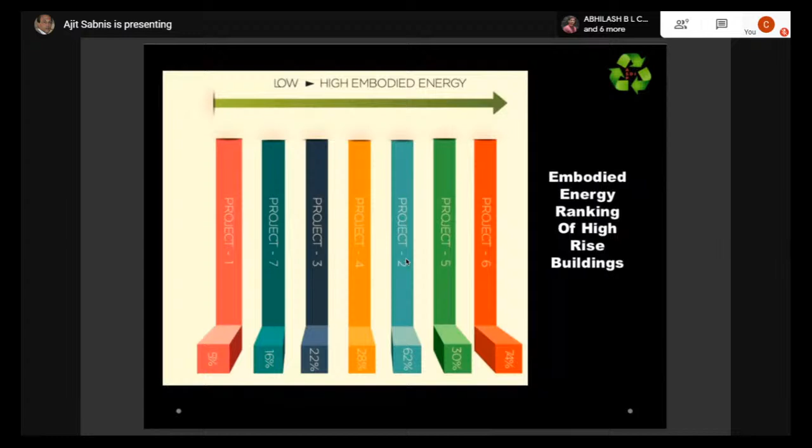This is how, as an engineer, we can use our discretion and come to an understanding of the entire aspect of it. Similarly, you can represent and calculate for the walls, and for window materials, for a particular project we can do all these things.

But the present assessment also has a lot of limitations. The data is not available, that's why locally available data is to be used to the extent possible, and a smaller footprint needs to be achieved.

There are a lot of parameters involved. In this way, we can assess the sustainability of buildings and go ahead with this.